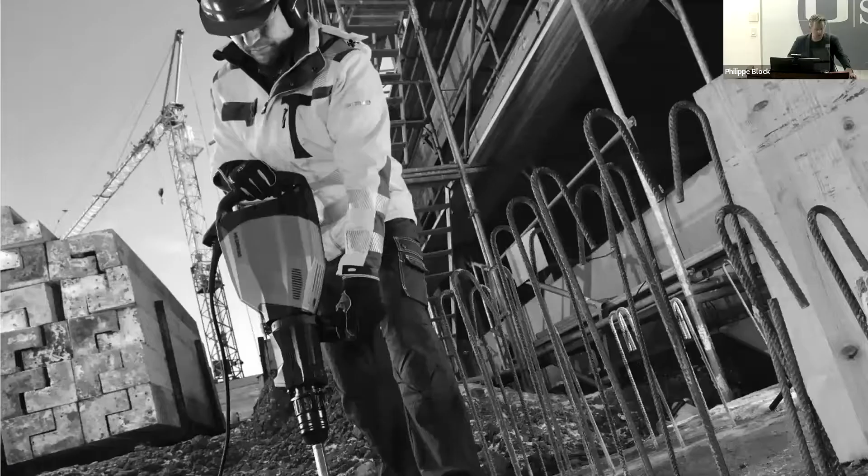So maybe first framing what really drives us, and it becomes an increasingly anxiety-driven straitjacket, is the tremendous challenge that we have to provide adequate housing and infrastructure for over 2 billion more people that will be on our planet in the next 20, 30 years. You must have heard calculations like this, that in order to provide that, we will have to build the equivalent of one New York City every month for the next 40 years. I truly hope that we will not be doing it like this.

I use this as an image of an industry that is outdated and has barely evolved in the last century, with this result: we are responsible for 40% of man-made greenhouse gas emissions, 40% of virgin material use, 40% of waste production, and, the one typically better understood by the general public, also a huge energy consumer. So when I talk about us, I'm talking about the construction and building industry.

So I hope with these few slides, I first and foremost hope that I'm preaching to the choir, but secondly, that you agree there is a need, a desperate need in fact, to change the way we both design and build our structures. And I will also be talking about how I truly believe that those two aspects will have to come together.

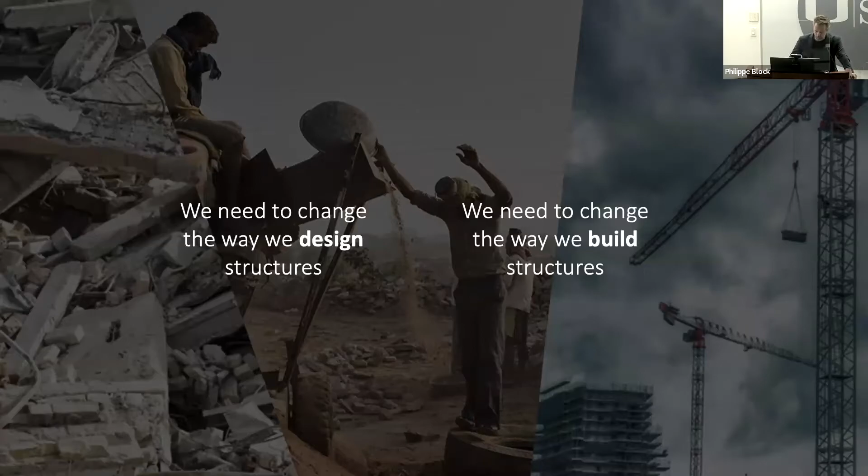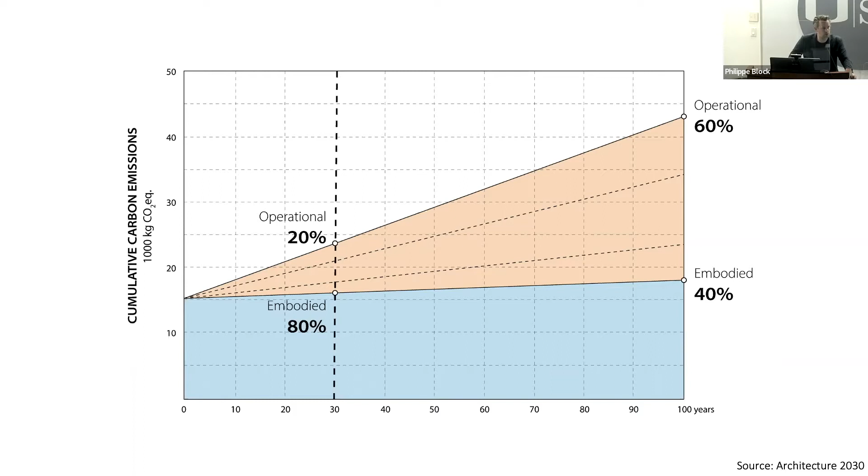As an architect engineer, as a structural designer, I will mainly be talking about embodied emissions—all the greenhouse gas emissions that have something to do with the making, so everything until you turn the key and start using a building. I will focus less on operational emissions, since there has been so much research and funding going into that field. And honestly, or perhaps said a bit cheekily—cheekily is a British word, so hopefully you understand—we have a solution there: just use green energy, renewable energy, and that solves the operational emissions directly. But we don't have such an easy solution for the embodied emissions, and that becomes truly the bottleneck going forward.

So ideally, we want to extend the lifespan of a building, a component, or resources. And that's where circular thinking comes into play, and I will talk about this later a bit as well.

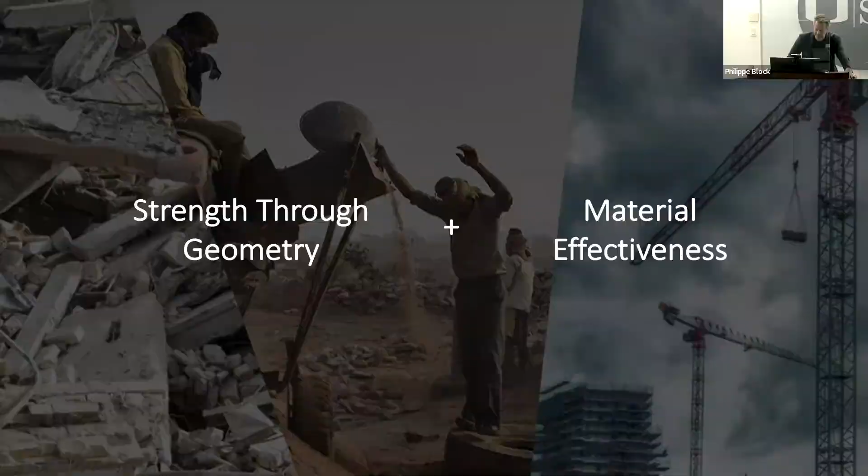I'll explain both through a couple of our projects, and this will nicely come together at the end. First, strength through geometry. The Armadillo Vault is perhaps one I want to show to clarify what you can achieve when you get the geometry right. This is what we showed at the 2016 Venice Biennale.

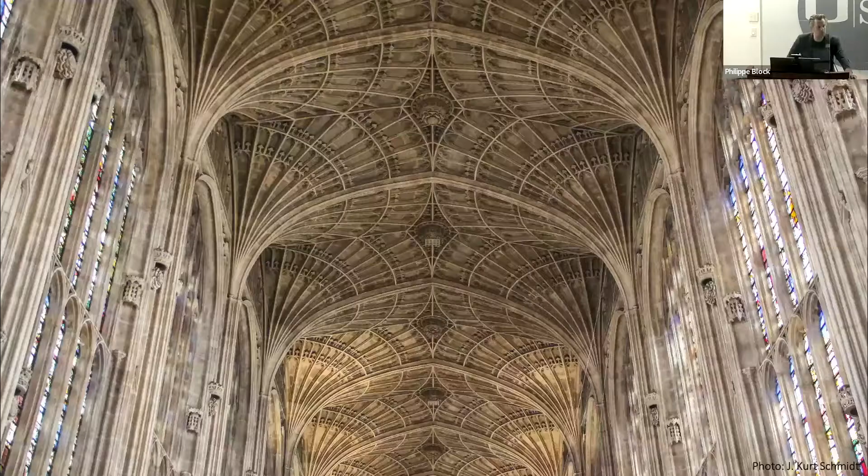And here the specific fan vaults of King's College. If you calculate their thickness over span, they are proportionally literally as thin as an eggshell. So these structures also stand without our typical reinforcements and high-tech materials.

That is what I initially did for my PhD with John Ochsendorf at MIT. I developed these methods to assess historic structures. But then in my research group, we started to translate these tools to discover structural form, and we did this through graphic statics and three-dimensional extensions of graphic statics.

We made tools to let other people discover the beauty of compression, that it's not just the boring dome, but there's much more geometry to be gotten.

I added this to give you a bit of insight that even though I'm emphasizing the power of geometry, it was also a beautiful project of rediscovering or translating historical principles of stereotomy, that Shirley Brandon talked about, into a computational framework that offered us an opportunity to realize this structure in just a couple of months.

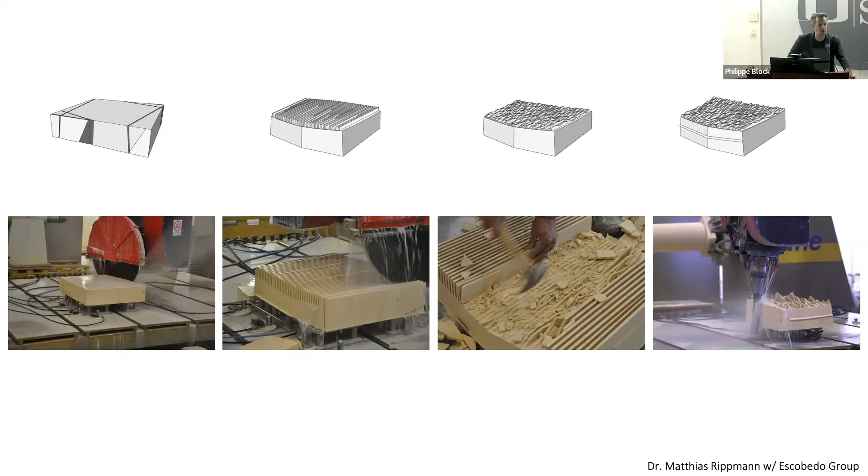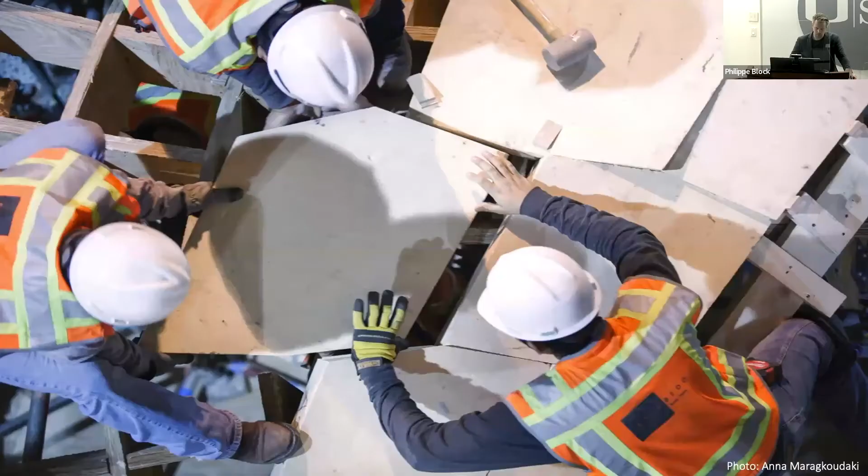With a reasonable budget, here are some details of the very specific fabrication techniques we developed to speed up the process, but that we then really used also as an aesthetic opportunity to make this unique shell.

Here you see our colleagues from the Escobedo group out of Austin, Texas, dry assembling the geometry. I didn't want any mortar or anything because there are too many skeptics around, and surely someone would have said it's the mortar keeping everything up. So we went as extreme as to assemble this 3D puzzle just with dry connections.

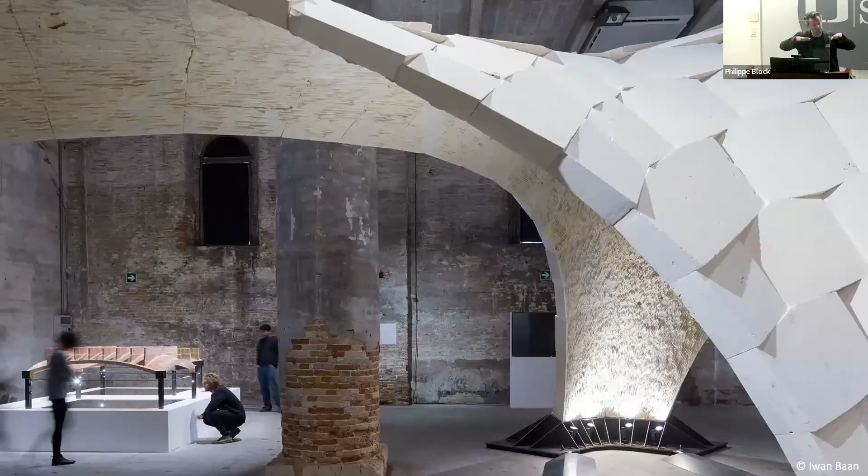As mentioned, what we like to try to do is let the fabrication and structural constraints speak and become an aesthetic by themselves. So here, for example, these planar interfaces on the outside had to do exactly with a fabrication optimization, since we never switched or moved a piece around because that was too costly, too time intensive.

That's where tolerances could appear. And then these interior roughness had to do with only describing this internal surface with a rough cut, then hammering it away and leaving that to express the global flow of forces.

The reason why I show this project is not only because I'm proud of it, but mainly because I want this image to shake up architects and engineers, that we should reintroduce structural form to activate humble materials in a safe way, like we used to be able to do, like the master builders used to be able to do.

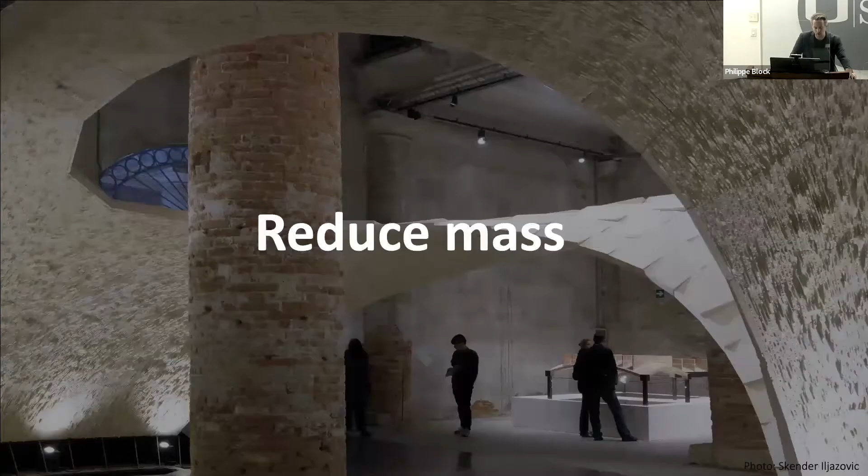So what you see here, this 2 inches of stone touching, is a first hint at why I care about good structural form. You can significantly reduce the mass.

A second project that I was only involved in towards the end, but very luckily involved by Peter Rich Architects, John Ochsendorf and Michael Ramage, is the Mapungubwe Interpretive Center in South Africa.

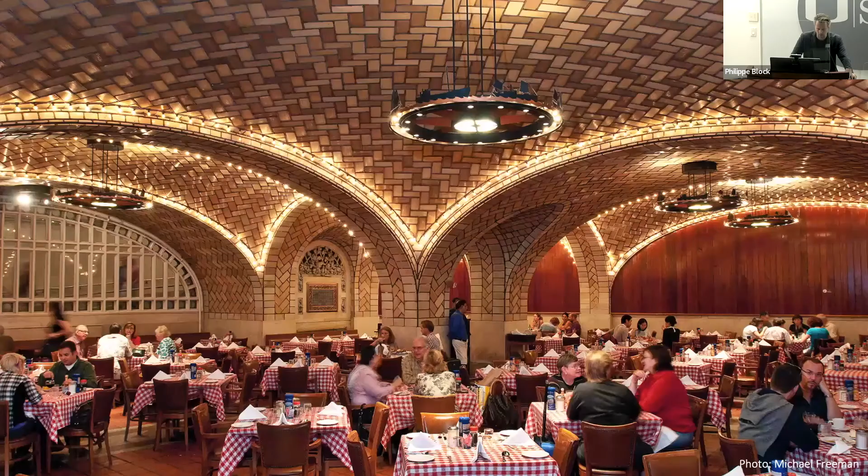I was lucky to be involved. The new tools that I developed for my PhD, thrust network analysis, were used to do the safety assessment of all these vaults, to give the engineers the courage to go for a fully unreinforced structure based on local resources. These structures were a reinterpretation or bringing back of the Guastavino vaulting.

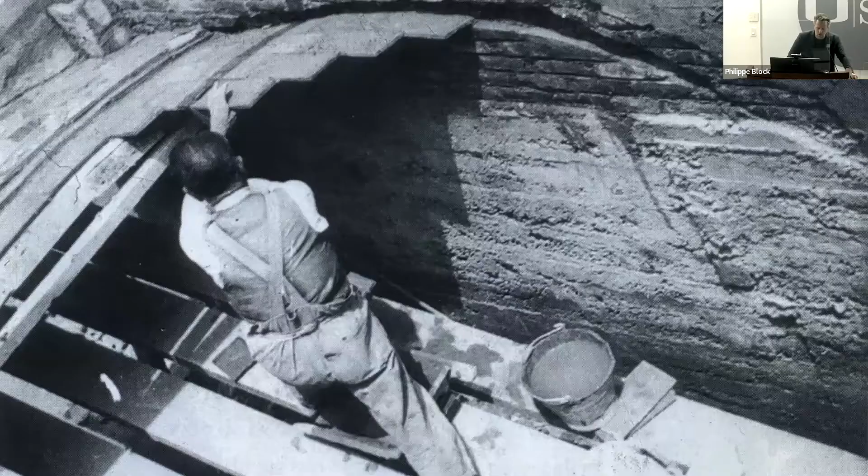So here maybe you recognize the oyster bar in Grand Central Terminal. What's amazing about this style of vaulting is that it's not only 3 layers of unreinforced tile that achieve these large structural shapes, but on top of that, using a Mediterranean technique, you can build it in stable sections using a fast setting mortar. You can imagine that not needing formwork to build this structural geometry was very important for a site that was literally in the middle of nowhere, on the border with Zimbabwe.

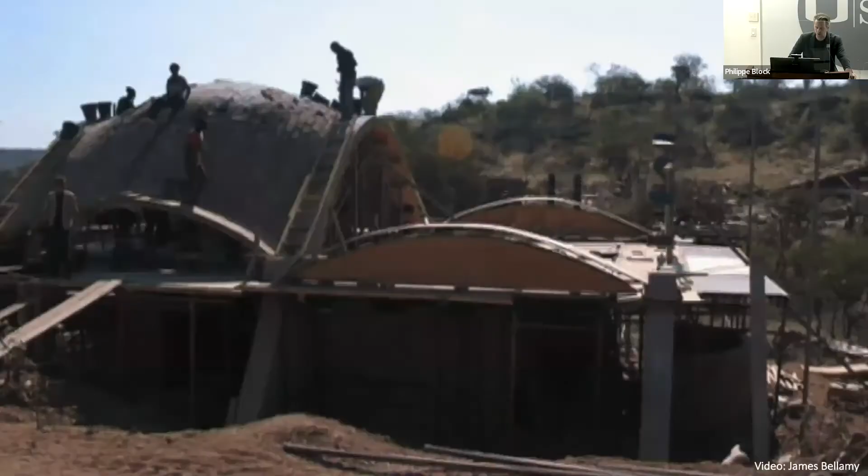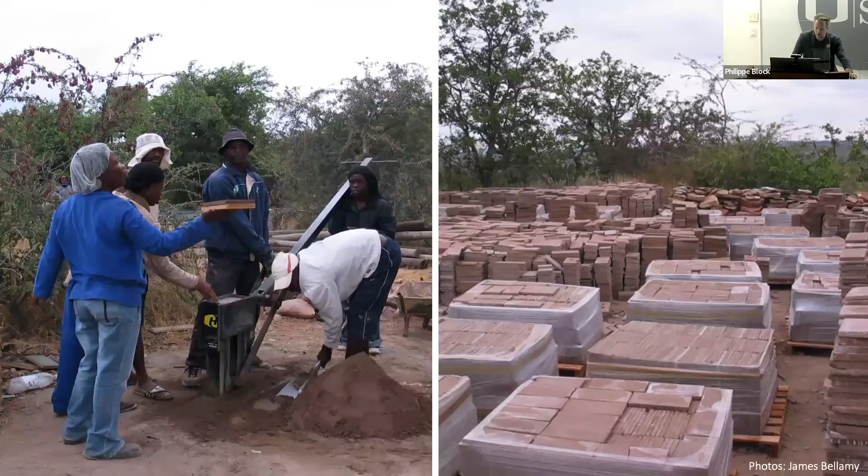So here you see the timber is only guide work to guide these local laborers, who a week before were carpenters and farmers, into this new technique. So here's the first shell that they managed to build literally with only local resources - not only local materials, but also local labor.

The local material was just pressed soil, unbaked tiles. For this specific soil that came from the site, 7% of cement was needed to stabilize it so that it would be just strong enough for the purpose. But I'm showing you this project because this is still one of the most eye-opening moments in my career, and it's still driving a lot of what we're doing right now.

The difference between those 2 images: on the right, the women of the village are carrying the tiles in very small packages. The reason for this is that these tiles are so weak that you can just snap them in bending. But they take peanuts in compression - about 10 to 15 times less than a standard construction concrete. So they're only designed to take compression.

And you see that these weak tiles, that no one today would consider a structural material, if you place them where the forces naturally want to flow, become indeed safe materials, as we used to build our constructions in the past with vaulted kind of geometries.

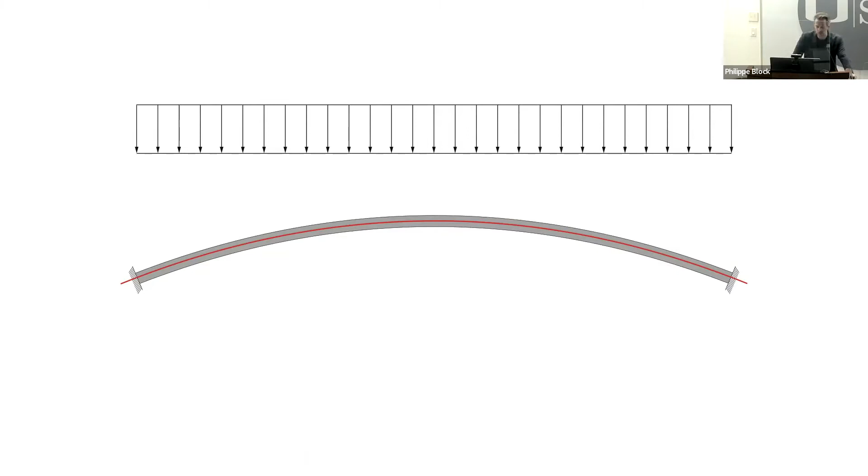So how that works is that an arch is a good geometry for a certain loading case, but we also need to take some live loads, like users. The red line here represents where naturally the forces would want to flow in compression. You see that here we don't stay within the section, which would literally mean collapse. So that means you need a stiffening scheme.

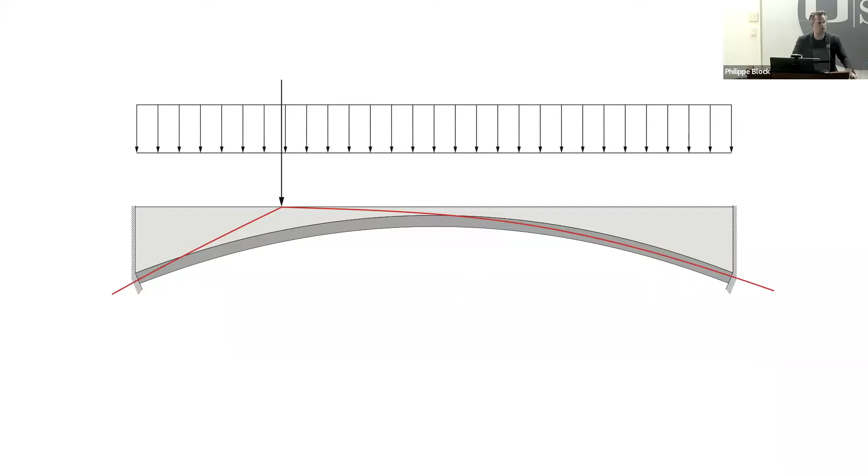In the first project, the Armadillo Vault, we had this double curvature that actually gives you that stiffening for live loads. In these shallow kind of structures, you need to do something else. So here, for example, these stiffening spandrel walls were added, and you see effectively what it does - it provides a direct load path for the compressive forces to go to the supports.

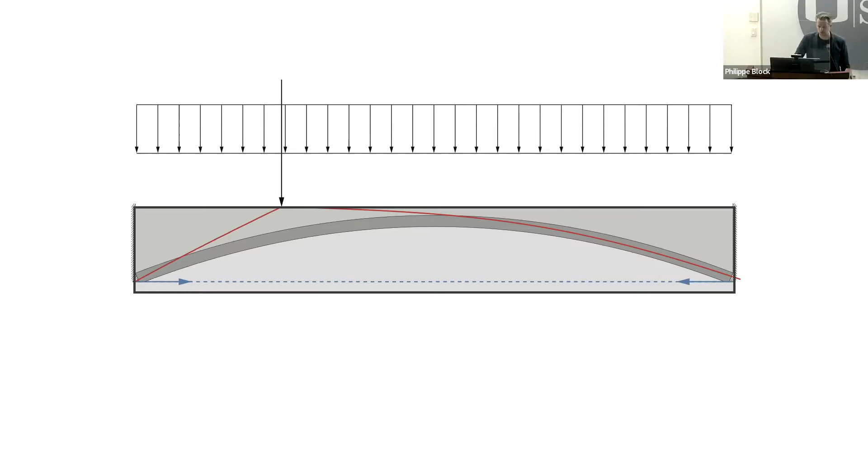If you then add a tension tie, what we just did in the last 20-30 seconds is we basically rediscovered or brought back a perfectly viable alternative for a reinforced concrete floor or beam, but one that uses 70% less material. So there is no rocket science here - this is just bringing back these principles, but in a context of resource scarcity and emissions and so on.

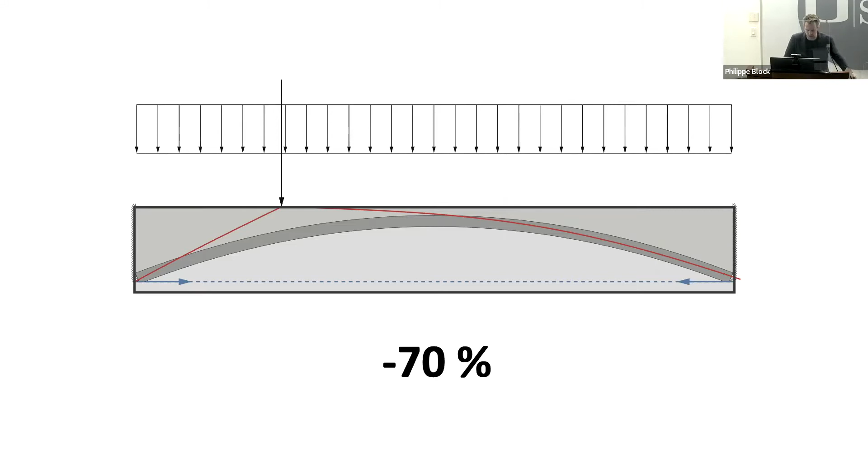This is for me an important starting point. And as you see here, this floor is happily still the structural component for the floor of this museum. But what I forgot to say is that another thing you get by placing material naturally where it wants to be is that the stresses in your structure are very, very low.

And this is also an important aspect, because there is almost a one-to-one relationship between how emitting - the carbon footprint - and the stresses of the material are the same. So by getting the geometry right here, we could just use this local soil, these weak materials, with peanuts of cement added. So a second reason to get the geometry right is not just to reduce the mass - that is only part of the equation - but also to reduce the stresses in the material and to be able to activate very weak, very low impact materials.

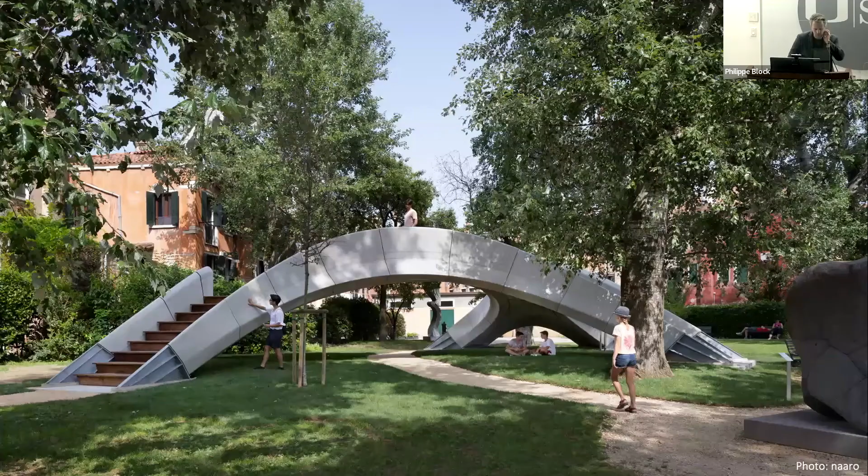So all of these ideas we brought together, and in the last Venice Biennale, in collaboration with Zaha Hadid Architects, the computational design group, we wanted to show these same principles on a material system that is very much en vogue, which is concrete 3D printing. So what you look at here is an unreinforced masonry, fully unreinforced concrete 3D printed structure.

I want to emphasize that there is absolutely no reinforcement, not in the material, not in the global structure. The reason I wanted to bring this message in this context is because I consider concrete, not reinforced concrete, but concrete as an artificial stone. And a stone is happy in compression. A stone wants to follow these logics of masonry systems.

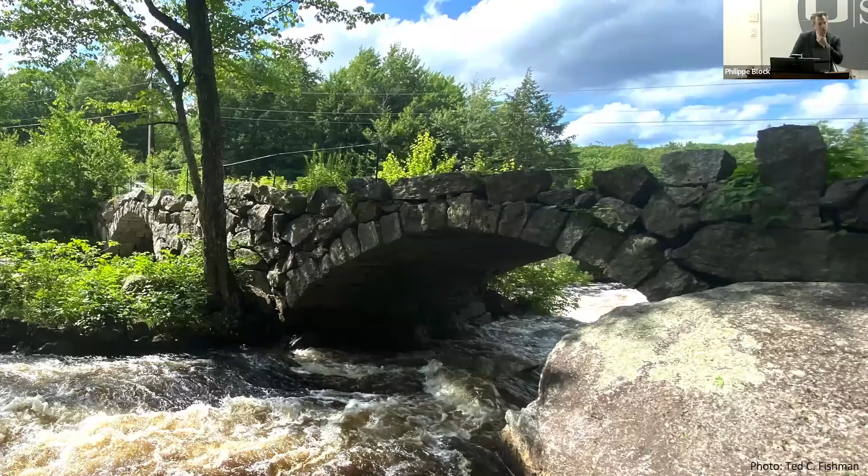So for this project, we use masonry on two levels. Globally, it's discretized like a Roman arch, for example, a Roman bridge or viaduct. But also on the level of the 3D printed components, every single layer is laid such that it is as orthogonal as possible to the dominant force flow.

This is an important aspect because in most 3D printing applications you see, designers are from the beginning fighting against the natural delamination that happens between those layers. But if you get the geometry right and place the layers where these compressive forces naturally want to be, you can actually use these beautiful 3D printed synthetic stones.

In a way, you can use them directly structurally and not just as a glorified formwork for a high performance casting concrete structure, a reinforced concrete structure. I'm blatantly attacking most of my colleagues in this field, but that is the point I wanted to make with this project.

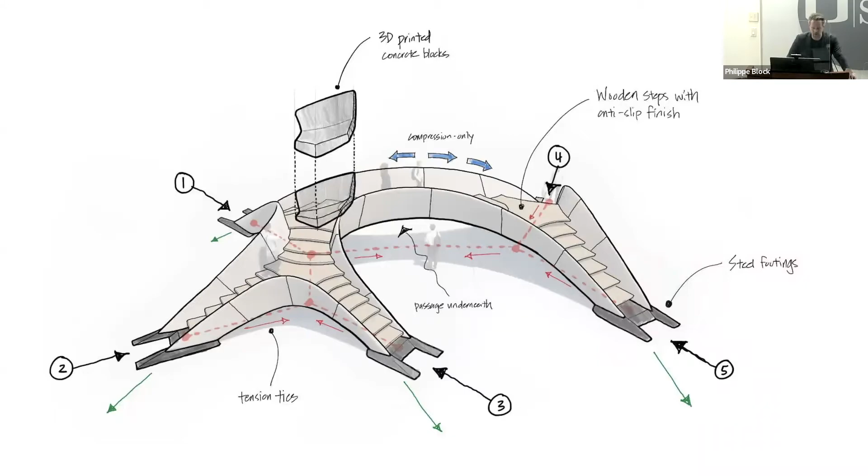So we used all our tools that we developed for assessment and design to design this bridge. But we also use state-of-the-art concrete 3D printing, called 2-component concrete 3D printing, which allows much more control. As you see, these non-parallel print layers with non-uniform layer thickness — it's warping in 3 dimensions.

How we approach these projects is also a bit untypical, so I want to quickly talk about it. We don't first design a structure, then discretize it, and then hope all the layers will not collapse. This is actually the work of Shajay Bhooshan, which is also the link to Zaha Hadid Architects — he's the head of their internal research group.

That's always a good collaboration when you can boss around your collaborator, because he's still finishing his PhD on this topic. What I wanted to say is that we actually encode all the fabrication and structural constraints in the print path, so that whatever we generate is both structurally and fabricationally feasible. That means we treat geometry as implicit and the print path as explicit.

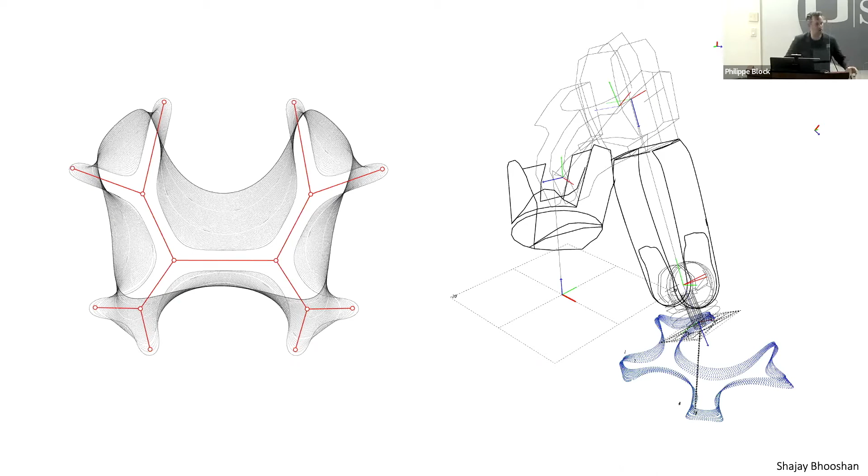And that is an exciting other way to look at design. By doing this, we can really capitalize on the promise of 3D printing, that you place material only where it's needed. You see that on the inside of these voussoirs, these 3-dimensional elements, we lighten them up. And on the right, also precisely where needed, because all these print layers are laid to align with the force flow.

Perhaps an interesting aspect is that I talk mainly about environmental aspects, but we also want to crank up our productivity to faster deliver solutions. In that context, it's exciting to share that these 53 blocks for this diagonal 20-meter spanning bridge were all printed in a total of 84 hours.

That is a nice aspect as well, that you can start to rethink the order of things — you can spend much more time on design, development, and engineering, because everything is connected and synchronized. So the cranking out of the geometry at the end is quite efficient.

I want to, again, like I tried to do with the armadillo, give a little bit of detail on the fabrication. For example, in the initial design, we wanted the bridge to stand by itself, with no deck on top. So the top layer would also need to be able to take point loads, for example, of people walking on it.

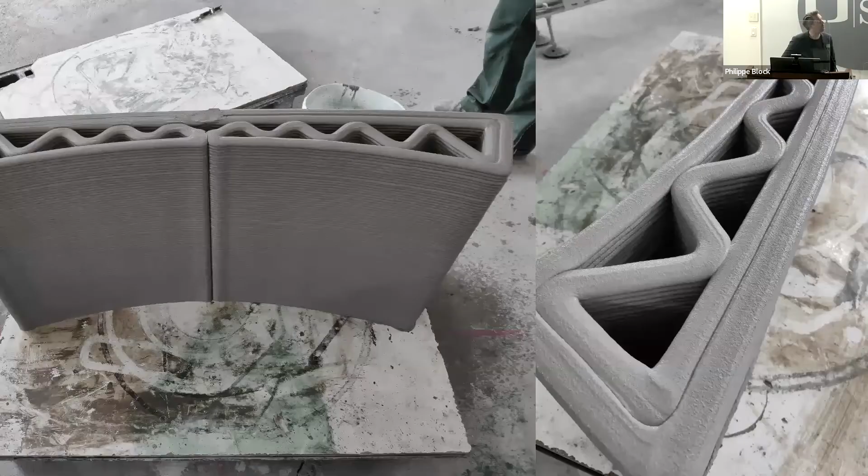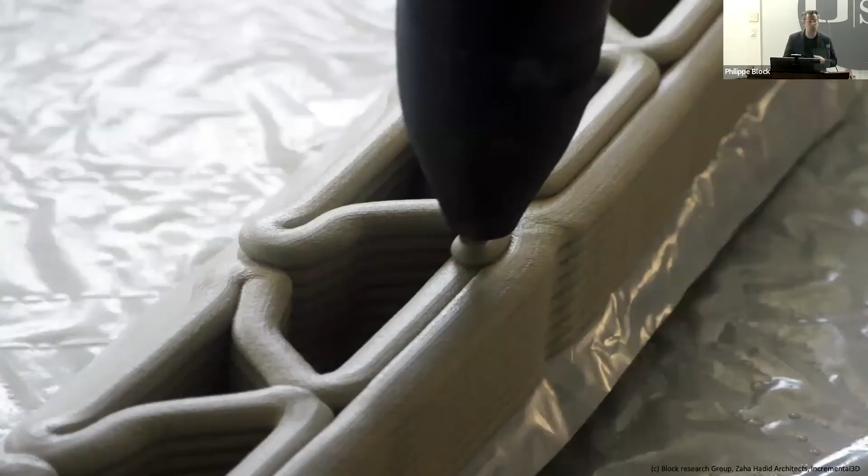For the specific material that we got for the concrete ink, the 2.5 centimeters that would naturally come out would not be sufficient. So we needed to double up the top layer only. And here you see what happens—in this case, a very undesirable kind of situation, this very pronounced feature in the middle.

Through prototyping, we saw that this is something that we wanted to avoid. So it was decided to turn around at every single internal aspect to effectively, as you can see on the top, end up with this doubling of the layers. You will see later how we use that in the shaping of the structure.

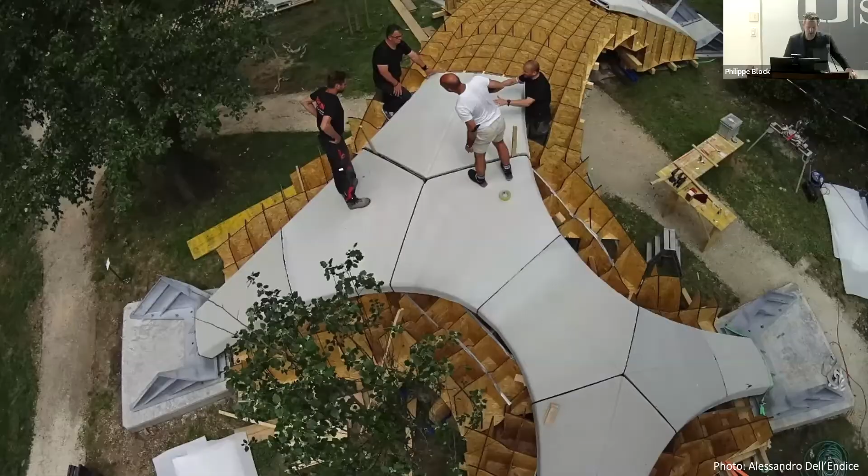Because material is only placed where needed, this was a very easy job done by my team together with only two professionals. Very quick assembly, dry assembly, equivalent to a stone-cut kind of masonry system. And here you see that the balustrades were also kind of dry assembled.

For me, I was excited to show this project because I wanted to share these messages. Too often we focus just on reducing, so that's the aspect of placing material only where needed.

But an important aspect we're showing here as well is that by separating compression and tension—having an unreinforced compression-only arch and then a tension tie—we have a very straightforward repair strategy. In a context of infrastructure, where embedded reinforcements cause corrosion and very fast decay, a topic that is very relevant here in the US, this is perhaps an aspect to look at.

Secondly, because of the dry assembly and because of the masonry logic, you get a nice locking of your geometry—the pieces come naturally together without needing a chemical or even a mechanical connection.

One could, in general—not necessarily for this bridge, that we would be reusing this bridge—but for prefabricated components in general, this is a very powerful outlook of being able to reuse the components.

And then lastly, recycling, which we did do for this bridge, because it's now taken apart, recycled, and it will be 3D printed again. So there will be a Striatus 2.0, called Phoenix, because it will literally return from the ashes of the original one.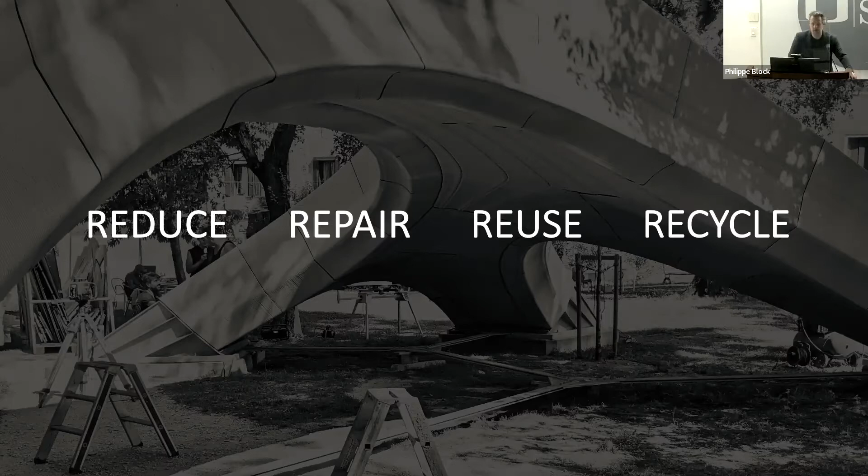So all of these things were layers—Striatus layers—that we wanted to show in this project. But here, maybe some nice shots, like for example these little traces that we then controlled globally. They actually come from the stiffeners on the inside.

So it's the nozzle changing direction and slightly perturbing the outside layer that was already printed. These kinds of accidents—maybe accidents the first time we did it—but then we recognized the design potential and globally controlled these features to add a bit more tectonic reading to this element.

And then I talked earlier about a fabrication necessity where we started to turn around the layers. You see here how we then use these kinds of seams to also express the dominant force flow and to give that additional reading to the structure.

Maybe a nice detail here is that the two little rascals are the two kids of my right-hand man, Tom van Mele, with whom—or maybe more my partner in crime—for all the crazy things that we do together in a research group and in practice as well.

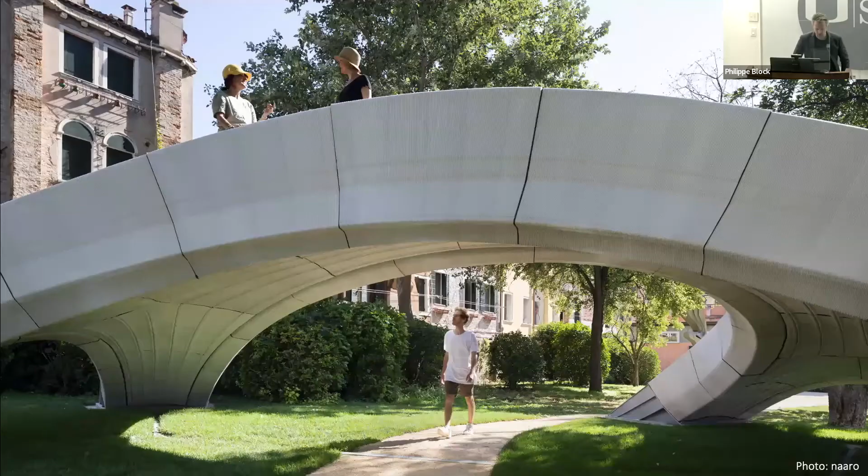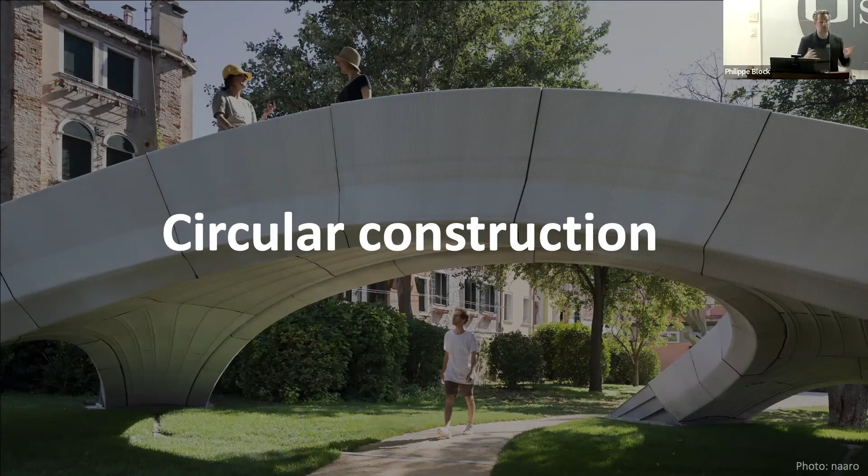So, but here with this image, again, kind of showing you this masonry on two levels—in the global discretization, but then extremely important also on the very careful layer deposition orthogonal to the force flow. And so I try to argue here that this stands as, of course, a very extravagant example, but there are many circular thoughts that we wanted to clarify that naturally come from this discrete masonry logic.

I already talked about collaboration with Zaha, but also incremental 3D needs to be recognized—absolutely, these digital crafts, people that do this amazing 3D printing, and then Holcim, who both developed the ink and also paid for the project, also not an unimportant aspect.

Perhaps a detail here is that 3 to 5 months is somehow how much time I get to crank out something crazy. What's important is that in these 5 months we were actively developing the design pipeline, the integrated computational framework. The engineering tools had to be translated from masonry assessment tools to design tools, and a new ink was being developed and tested by Incremental 3D.

All of these things were done in parallel because from day one we coordinated all the interfaces between all the different partners. We did this in a very coherent and disciplined way using COMPAS, an open source computational framework for research and collaboration in the AEC, that Tom has been developing for the last 6-7 years, which now became a full community project with many research groups all over the world working through it.

The reason I want to make this pitch is because the urgency is real and we can no longer afford to reinvent the wheel. So many offices are in their own bubbles, developing their own pipelines. Through COMPAS we share all the tools that we do, and we also show how we did our projects. We're building up that expertise and wanting others to jump on board and share their knowledge as well.

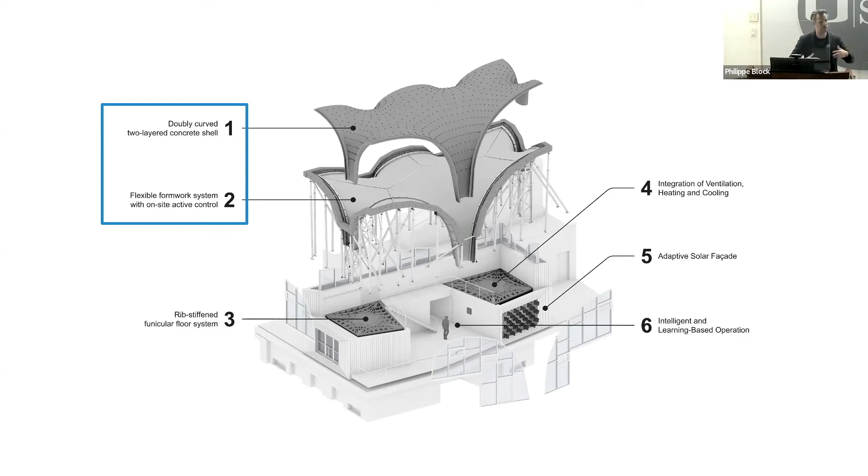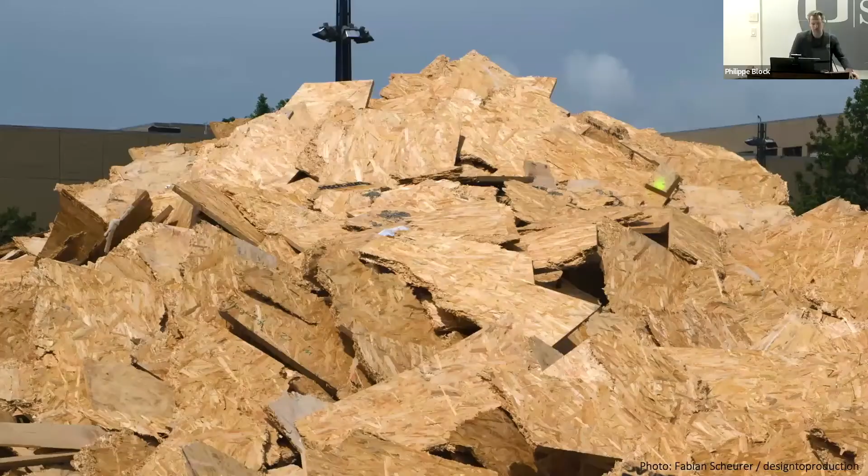It's a unit on top of a research building. We try to show a few things. I'll talk a little bit about the roof because it would be weird not to, even though I believe it's not the high impact stuff we're doing. What we did with the roof is we wanted to reintroduce these beautiful shell structures. A key bottleneck in this curved surface structure is how they're being made - you need all these foundations, scaffolding, an extremely beautiful timber structure that should be the structure by itself, but turns into this after 28 days when the concrete is cured.

So this is the promise. We wanted to see, can we scale up the academic promise of fabric formwork or flexible formworks, where basically we want to try to avoid this brute force traditional way of forcing material where it doesn't want to be. That's where all this scaffolding and formwork and single-use material comes from. So we want to try to introduce a flexible formwork like a pre-stressed cable net, and then offer the outlook you see here on the image.

This is long-term research where we ended up with these full-scale prototype images, which was also needed because, maybe rightfully so, we learned a lot from this prototype. The client thought that these two young Belgians could not be trusted to directly build this craziness, so we had to demonstrate it with all partners and pay for it ourselves to realize this.

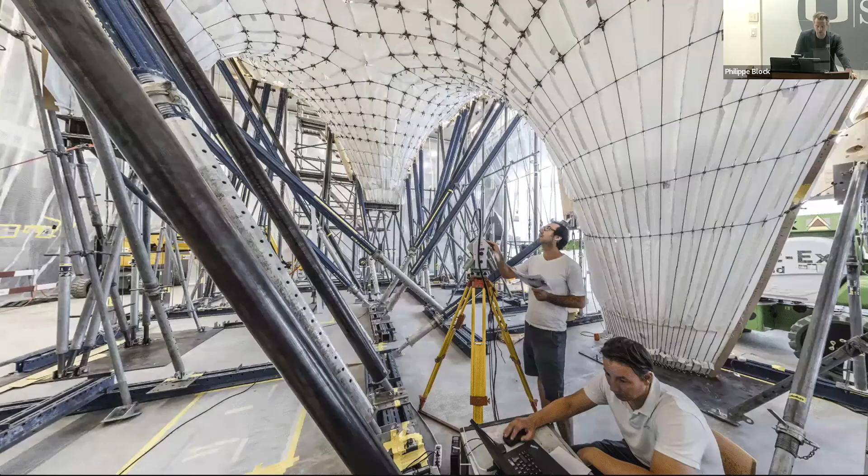We developed this kit of parts, then this fabric allows to cast on top. We developed systems that really could be done by typical industry partners. And then there it was - this was the prototype of the roof. It still took 3 years after this to finally get on site, but then here finally we could get on site, with the same kit of parts.

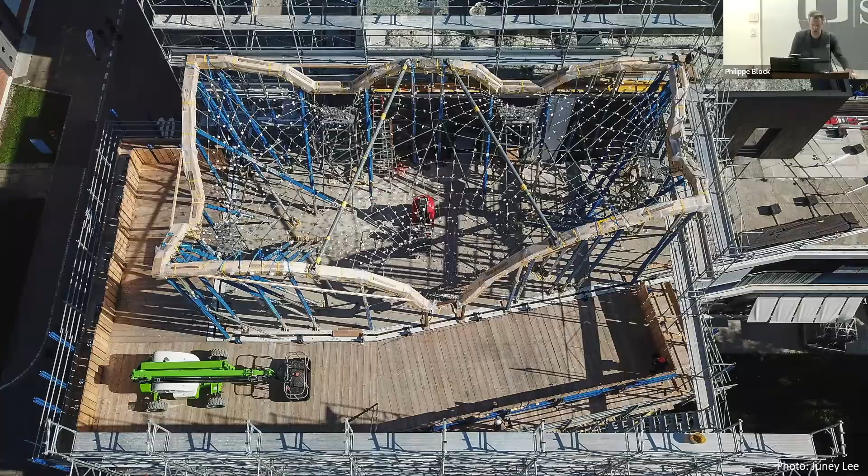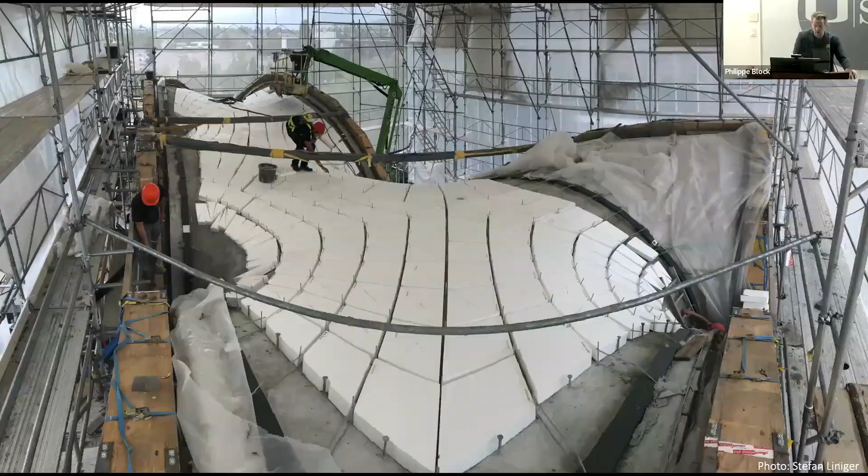It is a 2-layered shell, so it's actually unique - just over an inch, twice 1 inch of concrete that works a bit like a doubly curved sandwich structure. We have concrete going from the inside to the outside, so you see features like these facade details appear, with insulation in between, which allows this flying concrete from the inside to the outside without thermal issues, without thermal breaks.

And so this was after decentering. There it is now, still empty, but it will be quite a funky office for someone.

What I want to highlight is that I forgot to make the disclaimer: this project started 10 years ago. As a young academic, I thought this was the future, cool, this is what we needed to demonstrate. I'm still happy that we did it because it shouts at you and people are curious, then come and then they listen to what really matters.

You will learn about this next. But one of the key things we did is that we achieved this project to be on site, done by normal industry, normal concrete workers, on time, within budget, and within 1/8 of an inch of precision in concrete construction. Why this was possible is because we reduced the complexity to this one node.

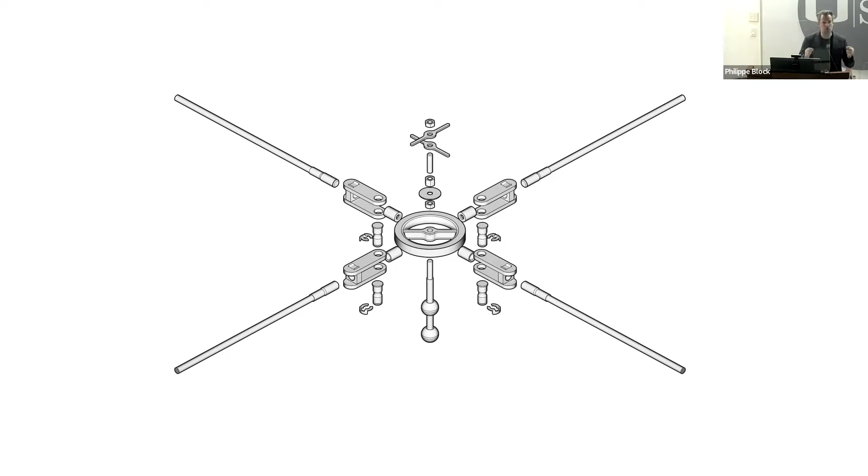So we developed this node that we then use to measure where things are, to nicely interface all the elements, but also to break up this craziness into 40 by 40 centimeter little patches that are practically straight and very simple. Again, you have all these little node elements that tell you your structure should be that thick there, your reinforcement should be connected there, and so on.

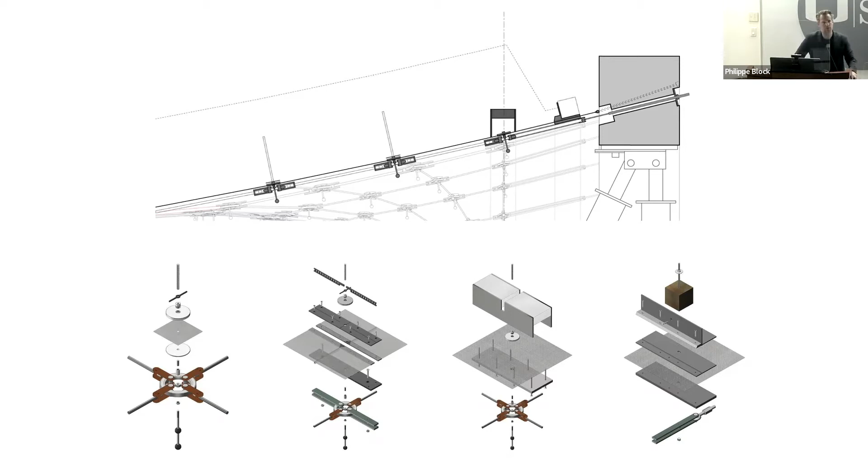So this is maybe the one thing I wanted to highlight that allowed us to do this. But also, this was the first project that from A to Z, including all the coordination on site, was done through COMPAS. Many people do sophisticated BIM, and our partners call it BIM on steroids, which is maybe a nice clarification on what we're trying to do.

But why I want to say this is that it's beyond BIM because it also allowed totally new algorithms and measuring techniques and new research to be introduced in a real project that was done with typical practice, many of whom have absolutely no digital expertise, have no experience with doing complex geometry. So this was really essential to do that.

And I'm very proud to say that we had absolutely no clash, no conflict, nothing happened on site. The reason for this is this diagram: we don't pass on models to everyone, but we have a central computational geometry and coordination hub that sends all the information from that source to all the partners. So there cannot be any conflicts and clashes because it always comes from the central core.

Maybe I'm emphasizing this a little too much, but through explaining how we realized that, I strongly believe that we also have to rethink the models of collaboration, and we do this through computation.

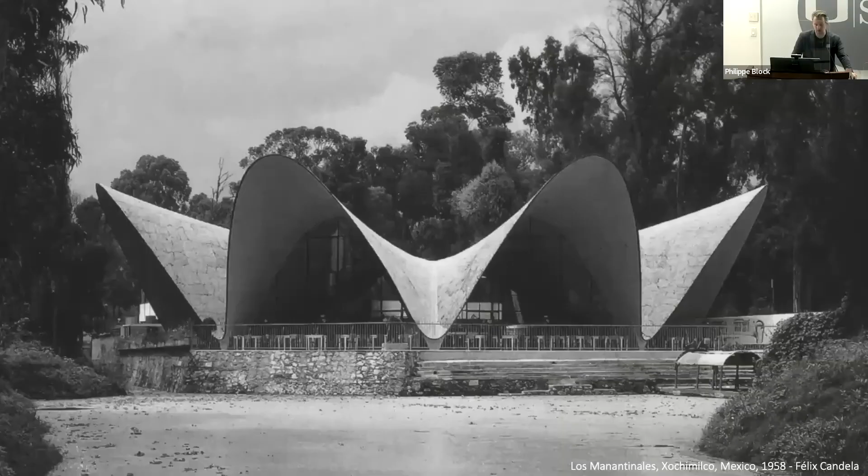In this context, I allow myself a quick sidetrack to KnitCandela, which we did in Mexico City, again with the same core group, with the computational design group of Zaha Hadid Architects. The name already hints at what we try to do: Candela, as in Felix Candela, the beautiful shells in Mexico City.

But again, there too, they need all that formwork. He was very smart to stick to hypar surfaces so that you can describe them with straight lines, so all this wood can actually be reused elsewhere. But you can still imagine the logistics, the labor cost, and things like that.

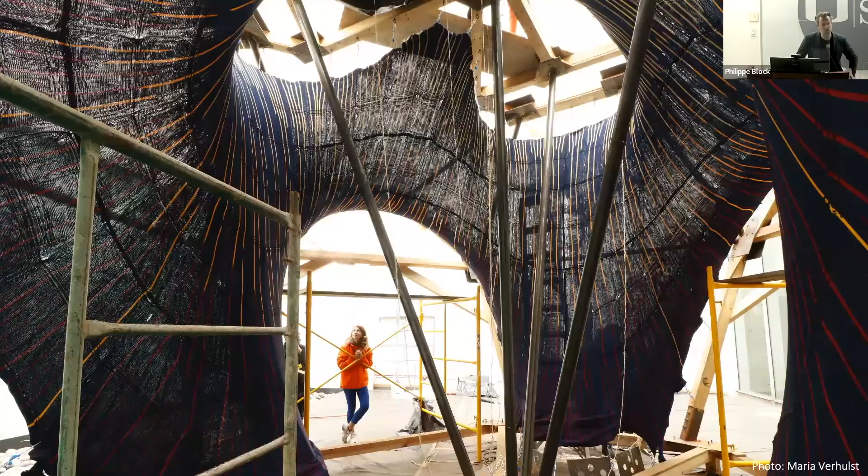So what we did in KnitCandela, very similar to HiLo but at another scale, is we used literally sweater material. We did a technical 3D knit that served as the formwork of the structure.

This was the work of Mariana Popescu, who's now professor in Delft, and a former colleague, Lex Reiter. Lex was our concrete magician who developed a stiffening paste that turned this sweater into something that is just stiff enough.

Here you see on the top right Mariana knitting arguably the longest scarf in the world, which could then be nicely vacuum packed, and it weighed only about 40 or 50 pounds. I'm not good at the count, so 25 kilograms.

And could be brought on site just in time to then have the very craftful local Mexican concrete finishers actually realize the shell. There's some details that are maybe interesting, that the little balloons created these pockets so that the final shell was not just a thin shell, but a shell with stiffeners running in two directions. This was to increase the structural depth without adding mass, so that it could be realized in this inner courtyard of the MUAC.

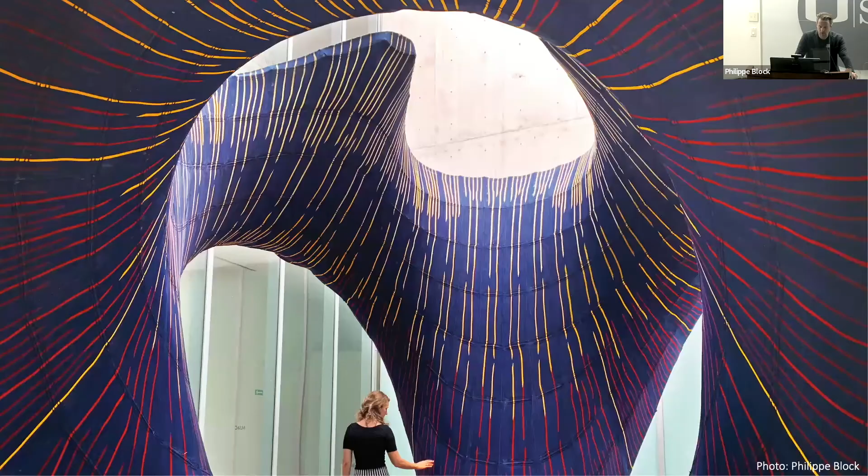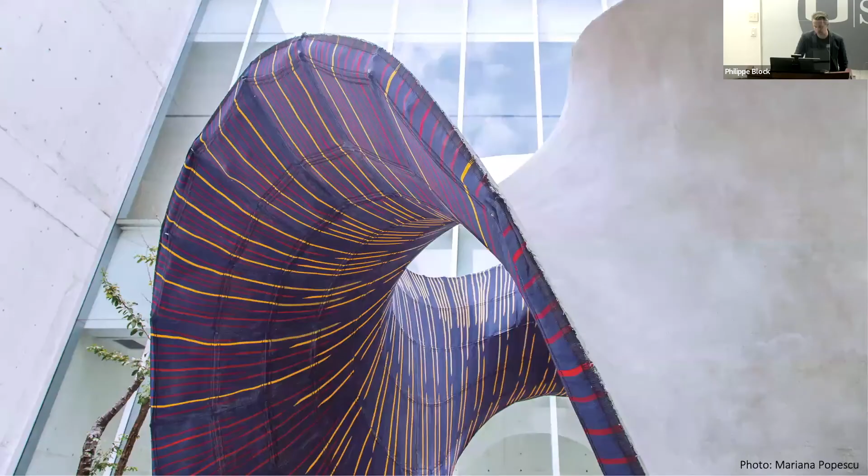So here you see, in this case, we left the fabric formwork as a stay-in-place feature, to kind of break with the coldness of the concrete. But here you see this duality between the two. And from the top, you then also see indeed again how thin this structure was. So this is really also about realizing structural efficiency, but not at the cost of all this formwork and all this kind of labor and cost associated to it.

So here, even though a very small project, I think the numbers are pretty cool. The shell is about 500 square feet of concrete that adds up to 5 tons. And then, except for the reusable external scaffolding, the cable net, all the connections, the knit and so on, including the stiffening paste, cost only $2,500 US. As I said, weight less than what you can take in a coach from Switzerland to Mexico City.

And then perhaps what's interesting is that if you were to mill such a formwork, then you would be milling for 3 months non-stop. The 3.5 months on the bottom was between the email by Zaha, like, do you want to team up for this exhibition, and the opening of the exhibition. In that time, we had to develop the system, do all the design iterations, the engineering models had to be calibrated and run over all the parametric settings. We had to go on site, work with a local crew that even the language was new to us. And so the entire knit was realized in a total of 36 hours of continuous knitting.

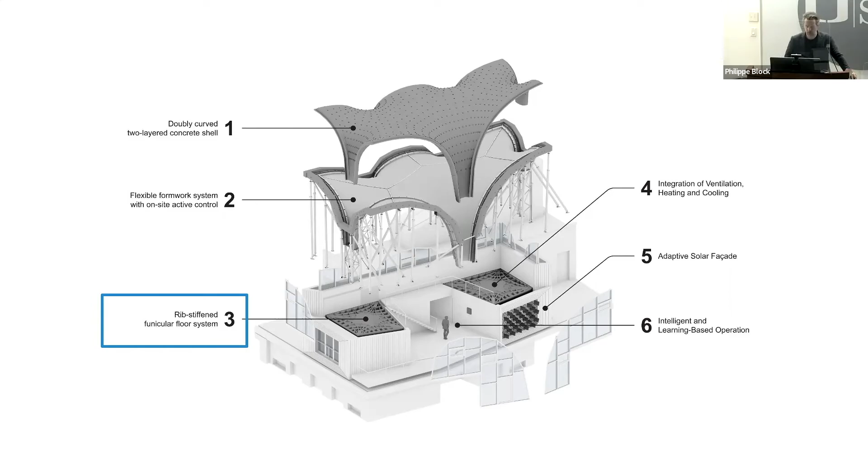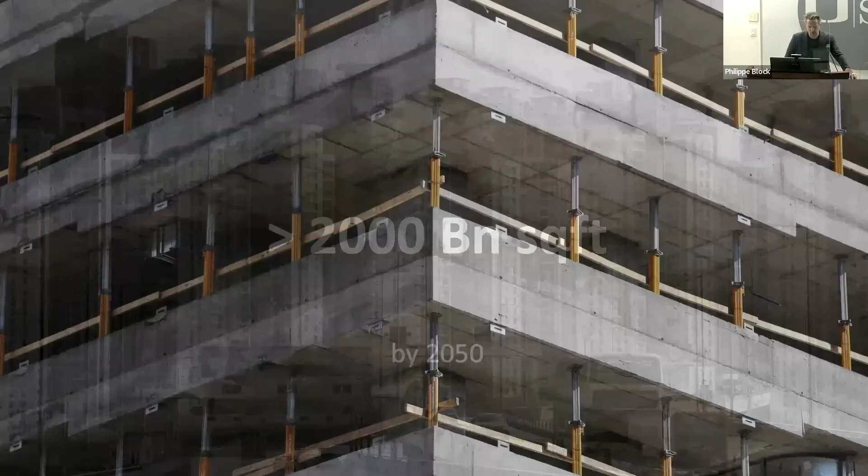So one of the reasons is that, I mean, we talked about this: one New York City every month for the next 40 years. Another calculation is that this translates to roughly 2,000 billion square feet to be built again. So I want to tackle these, and particularly for the medium high rise. So for the 10 to 30 story kind of buildings, a very common typology in a densification of buildings, even in Switzerland. This is now a typology that is becoming very common.

But if you look at these medium high rises, then you notice this: if you look at the distribution of the mass of these structures, then you see that 3/4 of the mass is in the structure indeed. And for me as a structural designer, this was not only eye-opening, but also entirely kind of unbelievable, because this suggests, and it is like that, the structure is mainly there to keep itself up. So not to users, not all the things that actually matter, but just to keep itself up.

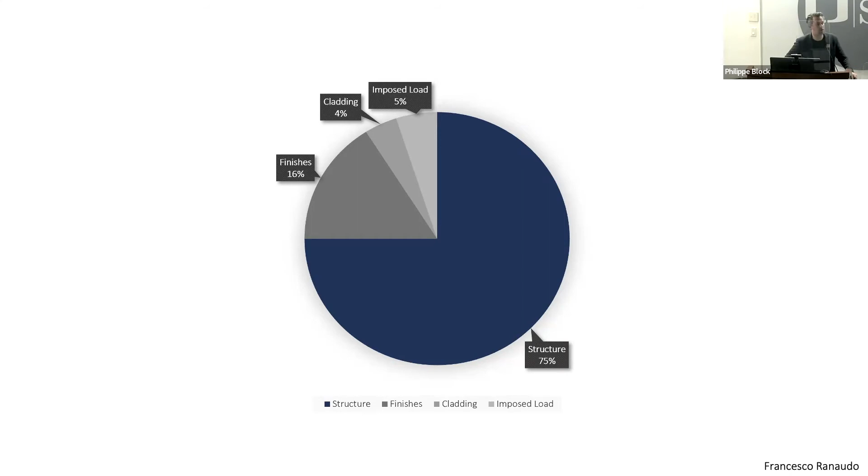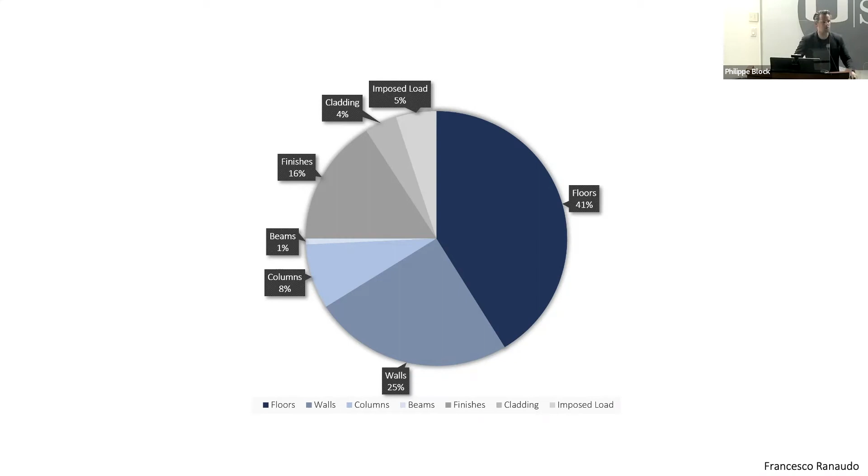If you then zoom in a bit more, and by the way, Bill Baker, with whom I'm teaching at IIT, said that if you look at all the skyscrapers in Chicago, we are talking about 50 to 60% is in the floors. So meaning again that this is even conservative, because we have medium kind of high buildings. So, but what this tells us is that the material intensity, the real bottleneck when it comes to all this emission that all these buildings are generating, is really the floor indeed.

And that is where I now want to switch and talk a bit about the other term. I was talking not about material efficiency, but material effectiveness. And we put another term there because we wanted to avoid that confusion of efficiency often being related to lighter, to less, and so on. While effectiveness has to do with using a material how it wants to be used.

And that is where maybe now it's appropriate to address the gray elephant in the room. So concrete, everyone seems to agree that concrete is the most destructive material on planet Earth. It's probably true because it has been used in bulk.

It has been used all over to build our entire world, and it also is being used inappropriately. I will come to this later. But I want to question this statement, because you will see later on that just focusing on the material and saying wood is good and concrete is bad is an entire absurdity. It's indeed how you use the material. Here, maybe a few hints, not proof, but hints.

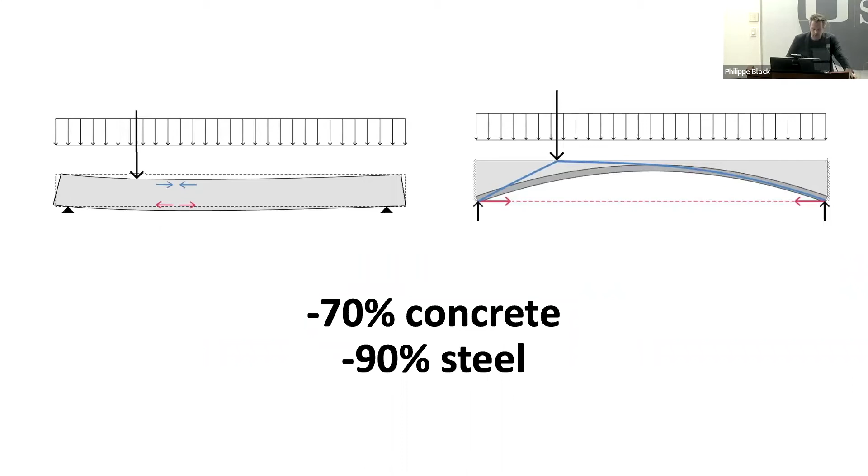So that is what we have been developing in a 3D way. Rather than just an arch with stiffeners, we have a 3D vault with stiffeners that accumulate to the corners, so that we only need super thin tension ties around the perimeters. An early model really shows these two aspects: the vaulted geometry for the dead load, and then the stiffeners for the live load.

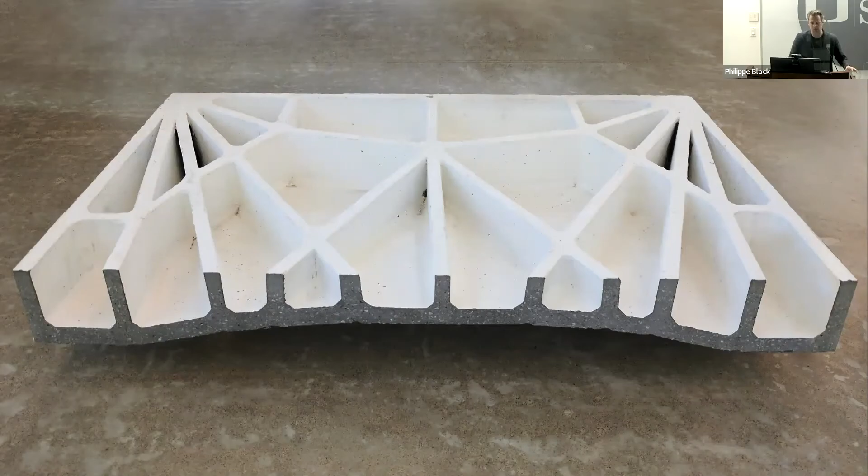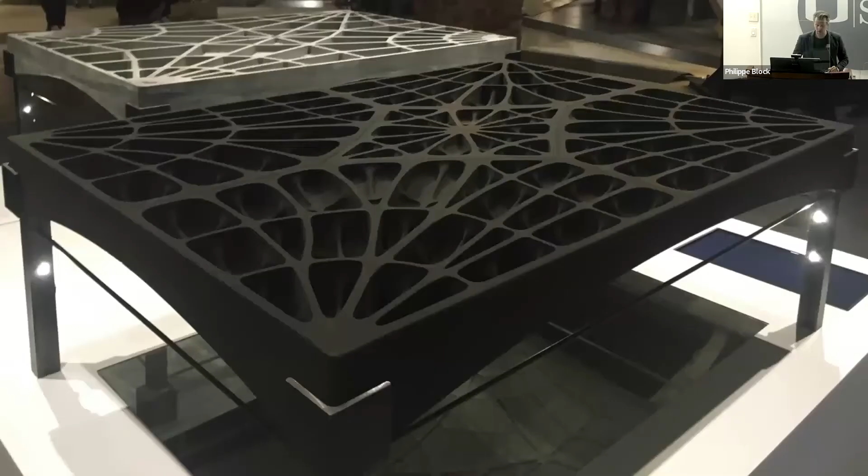And one of the prototypes was 3D printed, sand 3D printed. So a similar material to the weak material we used in Ethiopia - peanuts in compression, really. You can, if you take any piece out here, literally break it as easily as cold dark chocolate, of course the superior Belgian one.

So we took the sister - there were two of these models. One we still have, the original one, and the second one that we printed is the one that we demolished. We did the entire required loading protocol to demonstrate that this would be a safe structure for use.

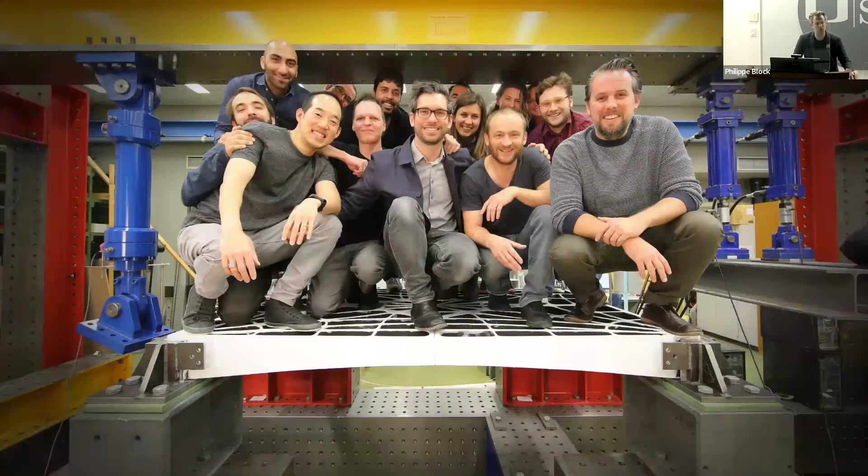And perhaps 1,200 kilograms of ETH nerds standing on a 2 centimeter unreinforced structure with material properties equivalent to cold dark chocolate is perhaps a bit more visually convincing, at least.

But so initially when I showed this in lectures, all the engineers just started to attack me, that this has nothing to do with modern engineering robustness, this and this. And luckily, actually, what I am suggesting is nothing new.

Yes, we are developing new computational methods for design and engineering. Yes, we now have digital fabrication that allows us to realize these non-standard geometries at construction scale at a competitive price. But we have history with us, right?

Because what I didn't say about the oyster bar is that it's not only built without formwork, it's not only 3 layers of unreinforced masonry - it has the same material properties as the 3D printed structure that we've had, but these shells are actually carrying the Vanderbilt Hall on top. So if you think that what I'm reintroducing here is entirely crazy, then perhaps we need to warn millions of New Yorkers going to work every single day that they are in danger of dying.

So that is then what we did in the floor. We have this 3D floor - it's the first one that got built. And with this, maybe a small sidetrack: the importance, not just of prototypes, not just of demonstrators, but here having an opportunity to really build this was essential to accelerate this.

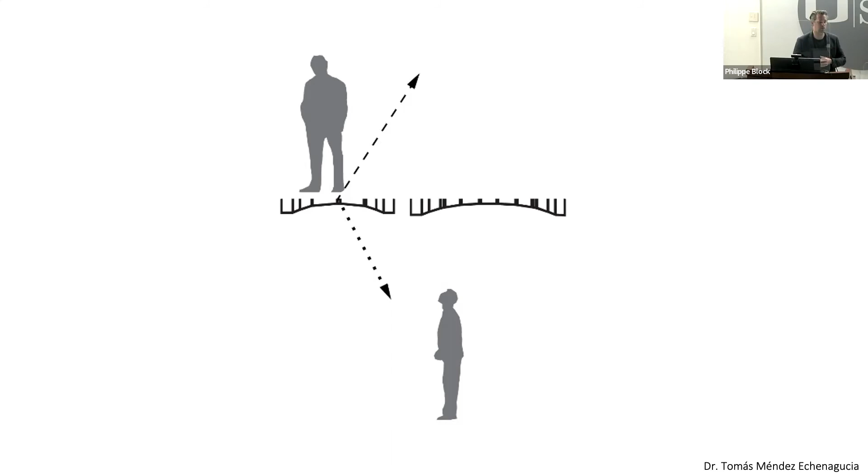This was great about doing this project because even though we did the research and all the acoustical tests with experts, not just our group, we teamed up with experts, clients and big real estate developers aren't interested in academic papers. So it's cool that we can go there, and I asked them to bring more than one person so one can go on top and jump around. Indeed, 3 centimeters of material does the same as adding the typical mass suggested in the building codes. So geometry helps us really hit that performance criteria, which is exciting.

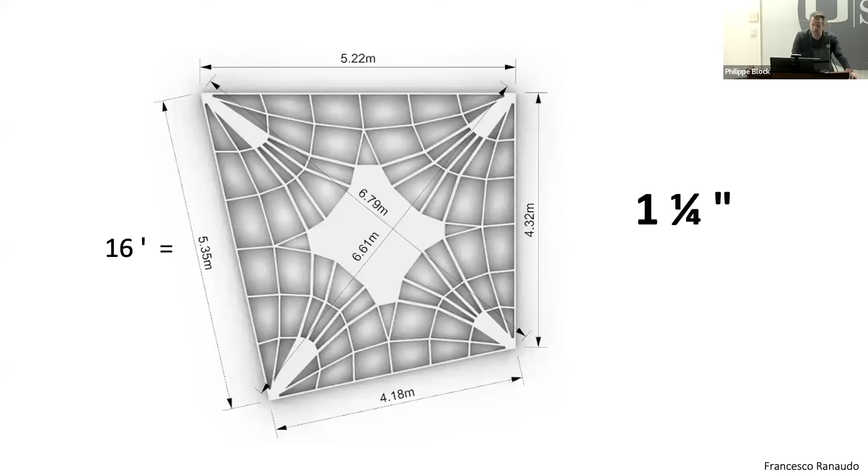I'm almost there. I want to zoom out again, because this is just one small project. But why I believe so much in this one small project is, let's go back to these towers that pop up all over the world, in the developing world but also elsewhere. If you take one, say 25 stories high, optimized to building codes, and swap in our system, called the Rippmann floor system...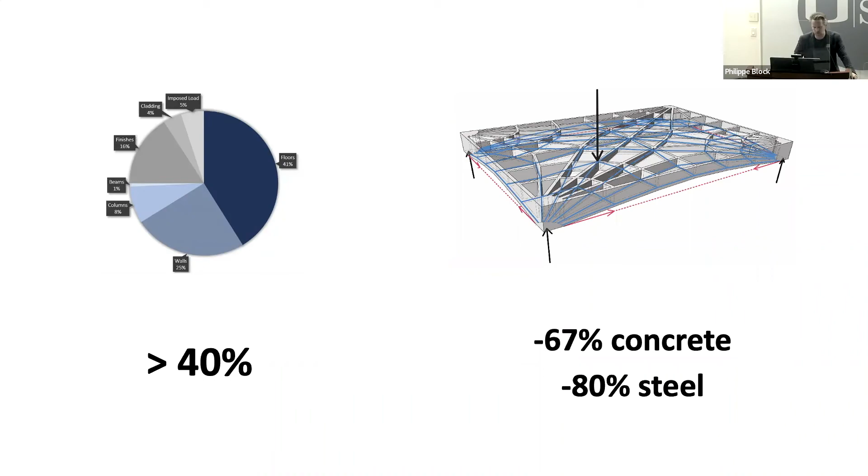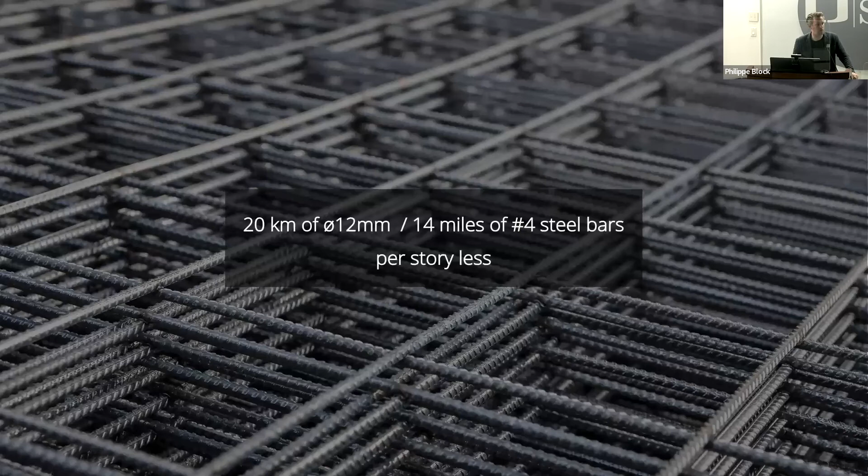So if you were to swap your floors with this system, for this one building you would save almost 10,000 cubic yards of concrete, which translates to more than 1,200 concrete trucks that wouldn't have to go to this building site. On top of that, you'd save more than 14 miles per story in reinforcement steel, which coincidentally, if rolled out, would go from Zurich, Switzerland, where I live and work, to Brussels, where I'm from.

I don't know what that is, it's a bit over 600 kilometers. So where would that take us from here? Typically I try to look it up and I forgot. On the airplane I had no connection, otherwise I'd tell you it's from here to Auckland. No, I don't know, I'm just saying whatever. Anyway, but it's not about volume.

I told you this is what really matters: the embodied emissions. Let's see how everything I talked about directly contributes here. Getting the geometry right gives you two things at the same time: it's not just about reducing volume, but also about lower stresses. So by just going to a lower strength concrete, you reduce the embodied emissions by another 20%.

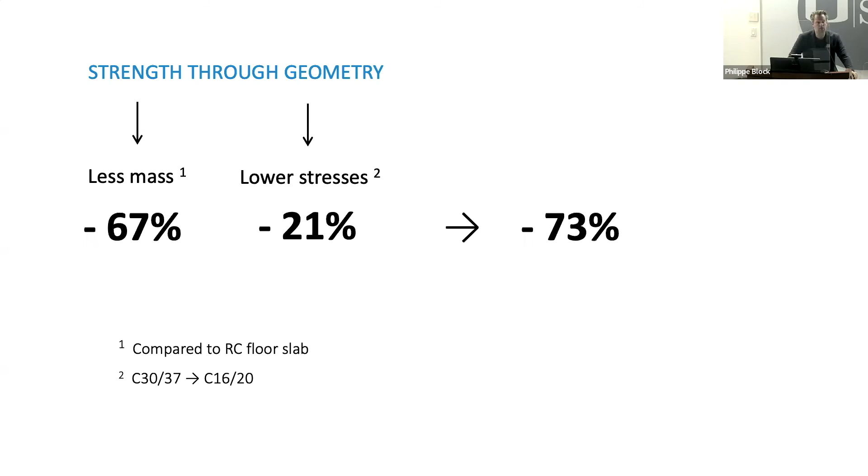So that gives you this 3/4 reduction on the embodied emissions. But then if you use, and I very loosely call it material innovation because it's already available in the market, these concretes that don't use only clinker like ordinary Portland cement but use fly ash and other tricks to reduce the clinker percentage. That allows you a very easy additional almost 70% reduction. So on the concrete level, we have reduced by 91%.

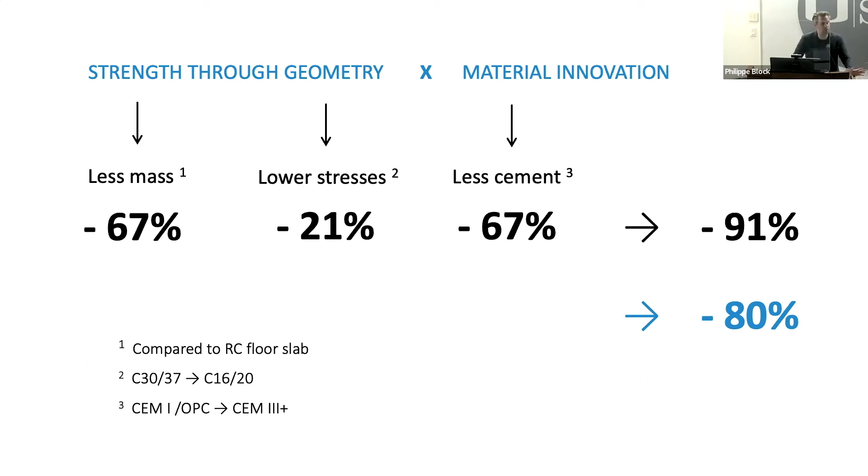Again, the steel is the same steel, so there we said we had a reduction of 80%. So that means that swapping those two results in a solution that is ready for the market today, at 15% of the global warming potential compared to your typical floor plate. So for a very banal element.

And now, based on this, we are with industry a couple of months away from actually launching this as a commercial endeavor to offer it to the market. We will offer this as a prefabricated, dry-assembled, low strength concrete. So all the aspects I talked about, which we basically presented in the bridge, are coming together with the efficiency of the shapes to offer something that can click in place and be very fast assembled.

This is not just academic, but I can unfortunately not show too much yet because we need to figure out how to make this into a business. So IP is still a bit of a challenge, but I want to nonetheless show you this project.

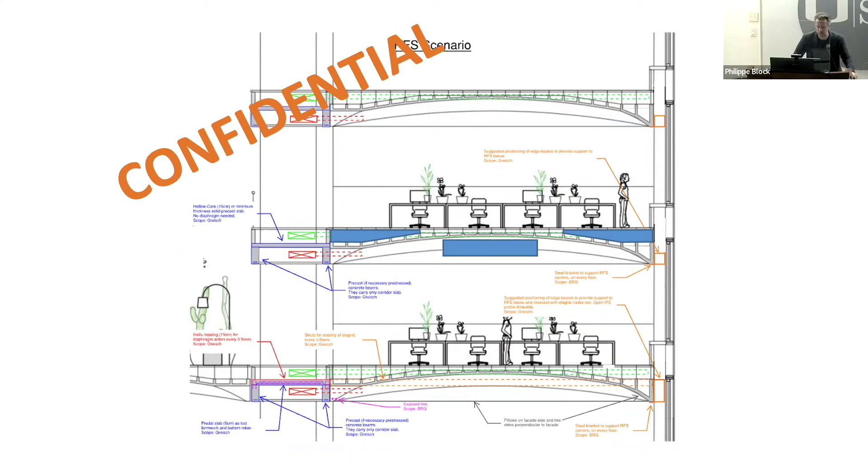But why I show you this image is also because where structure typically used to be, we're starting to use these cavities to optimize the floor-to-floor heights, and so we offer more real estate to our clients. So there we're kind of using all of these things, realizing that more than 40% of all these buildings is in their floors. That's why we're doing this.

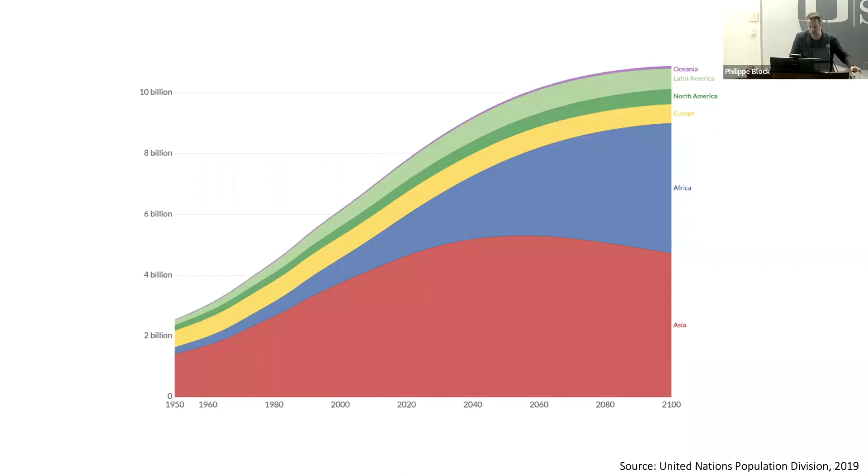As a last point, I'm fully aware that most of these new cities in the world will not be where I live, but will be in Africa, Asia, and so on. That is why I want to end by showing that, because sometimes it looks like, okay, this Swiss guy has too much money, that's why he can do it like that. But the same concepts work in very, very different contexts.

But so what to do with all this biomass? A small group in the Department of Environmental Affairs, under the lead of Stephen Lamb, developed this concrete-like material that uses all this scrap as aggregate replacement. The less cement you put in this mix, of course, the less strong this material is. So they've been using this kind of low impact material mainly for fill-in walls or for stay-in-place cavities in floor structures and so on.

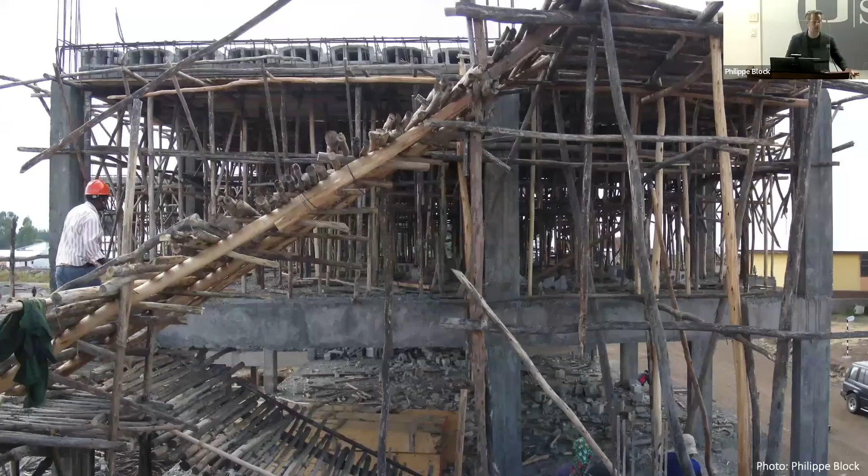But why they got in touch with us, I hope at this point you see where we're going with this, is that we can activate this weak, low pollution material as a structural material.

We can take practically all the reinforcement steel out. By that, we hit 2 birds with 1 stone: we deal with the environmental impact and we make it super, super cheap, so that it can serve the purpose that it needs to, as a low income housing solution that challenges the status quo.

This is a picture I took not in South Africa, but in Addis Ababa, where they're just trying to build like we do, and they don't have the material. The costs are out of control. And as you can see, there are also other challenges. How can you make it practically entirely unreinforced?

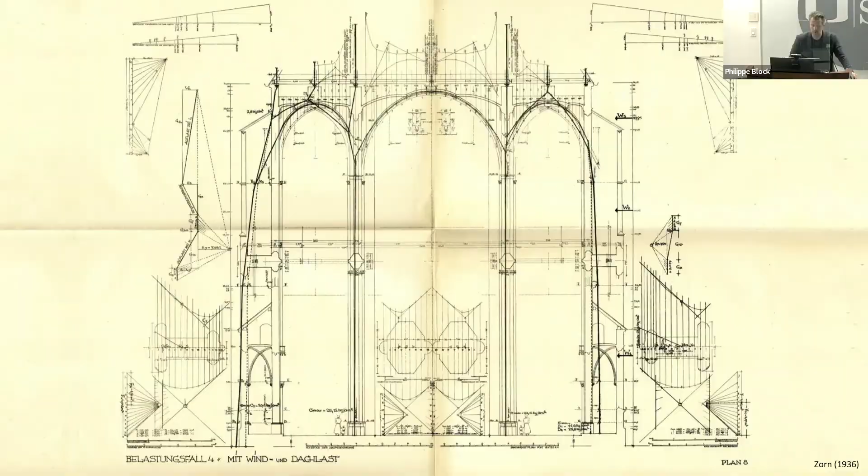It's about going even more extreme in the references, bringing these compressive forces down into buttresses. So we developed this buttressed construction system, where the only place with reinforcement is in these very deep horizontal transfer beams. That's the only thing with a very small amount of reinforcement.

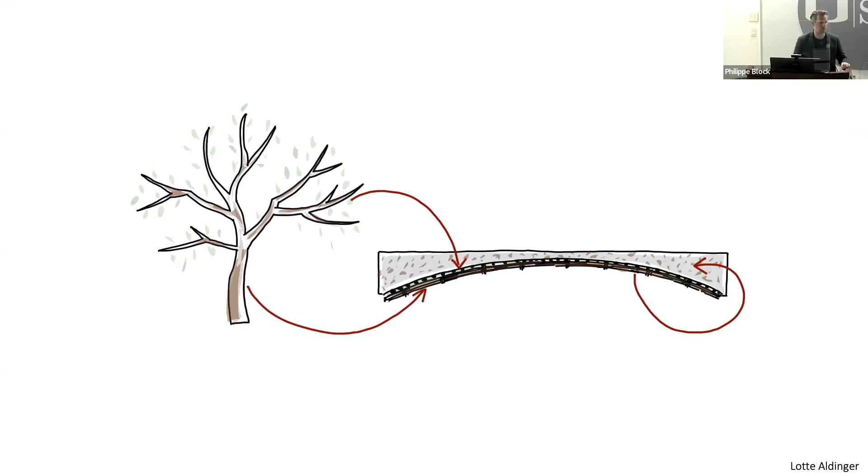What's exciting about working in such a context and really doing proper co-design is that our partners in South Africa brought in these basket weavers. These local basket weavers make the formworks, and after they serve a couple of times, we shred those baskets into the next resources for the next batch.

Joel was asking if I'm going to show something no one has seen, something fresh from off the press. No, sorry. Sometimes I get that right, but more often not.

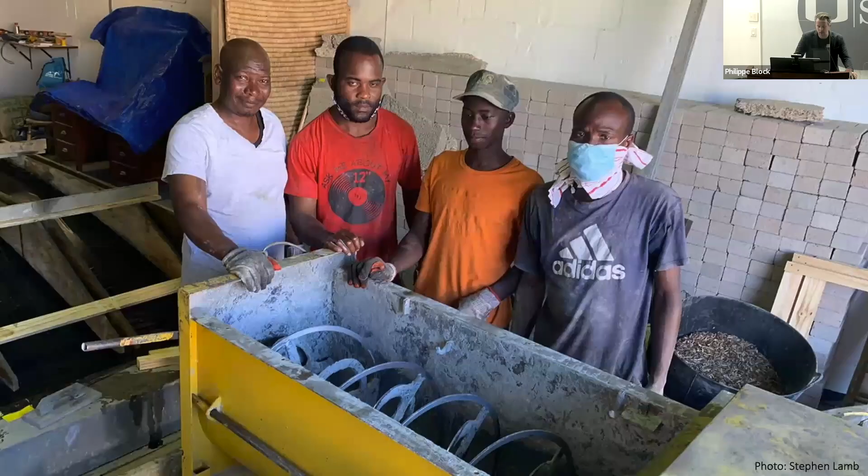We have just finalized 2 of the prototypes, 5-meter span, which were the last steps before building the first demonstrator unit.

What's interesting here is that you see these stiffeners appear again, going to zero at the support. That has to do with different conditions we need to deal with, like tolerances. We want this to be, for the engineers in the room, a structural 3-hinged arch rather than a continuous arch, using very low strength material as fill. You can see we use different gradients of materials as well.

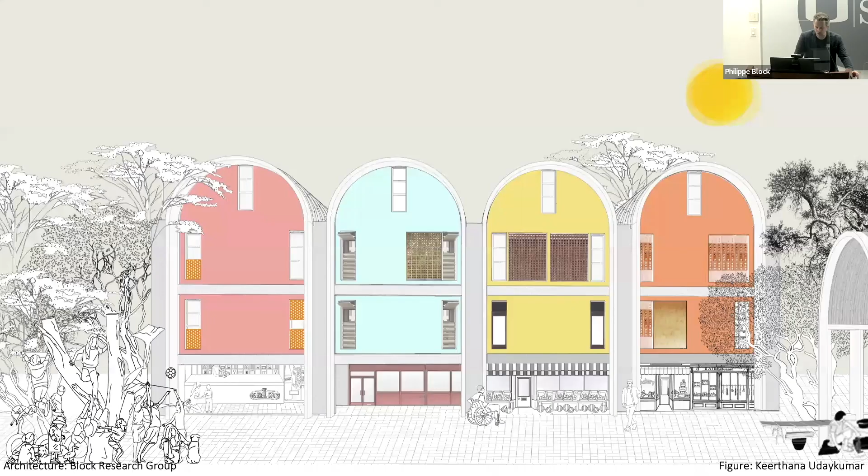As a last statement, I want to throw at you again that the challenge is so big that I think we all need to work on this together. So let's share a bit more and build upon each other's work rather than reinventing the wheel.

In summary, I talked about structural geometry to reduce mass. I talked about bringing back funicular, compression-only geometry to reduce the embodied carbon coefficients of materials because the stresses are so low. I touched a little on digital fabrication, which is really helping us introduce this non-standard structural geometry without the typical associated single-use material waste.

I talked a lot about discrete masonry and the potential of circularity with dry assembly, with the separation of materials that gives you direct reuse of components or recyclability outlooks.

I touched a little on my belief that in order to really disrupt and bring something different, we cannot do the typical sequential passing of the buck and responsibilities. That is where all these inefficiencies come into play. I'm not just talking about engineers and architects, I'm even more talking about, if you consider those both as designers, the disruption between what is being designed and how it's being done on site. There needs to be much more connection between all of that.

I gave you a few hints of how we do this through computation, but fundamentally I think that's something we need to do, because it's also the only way we can deal with what Bill Gates calls the green premium, the additional cost of today's sustainable solutions. If you bring them all together, then you will for sure beat the status quo.